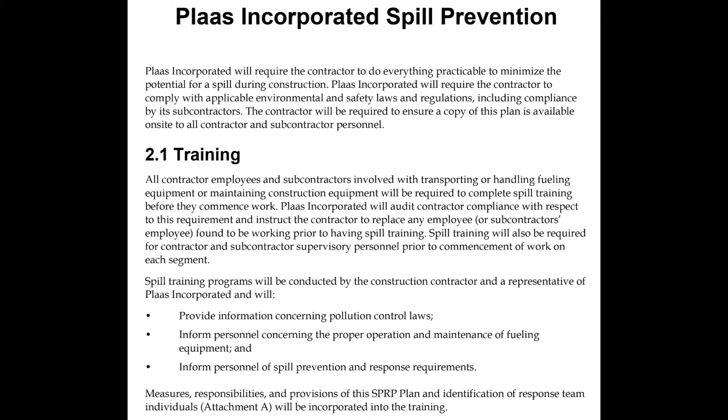Spill training will also be required for contractor and subcontractor supervisory personnel prior to commencement of work on each segment. Spill training programs will be conducted by the construction contractor and a representative of Plaas Incorporated and will provide information concerning pollution control laws, inform personnel concerning the proper operation and maintenance of fueling equipment, and inform personnel of spill prevention and response requirements. Measures, responsibilities, and provisions of this SPRP plan and identification of response team individuals, Attachment A, will be incorporated into the training.

Training for other workers will be provided through ongoing weekly meetings which will discuss safety and spill prevention and response, including personal responsibility to initiate appropriate procedures. These weekly sessions will be held by the contractor as crew tailgate meetings. Plaas Incorporated will audit the contractor compliance with this requirement and instruct the contractor to replace any foreman or subcontractor's foreman found to not be holding such meetings following the receipt of one warning. Attendance of training sessions will be documented using sign-in sheets, and this will become part of the permanent construction records.

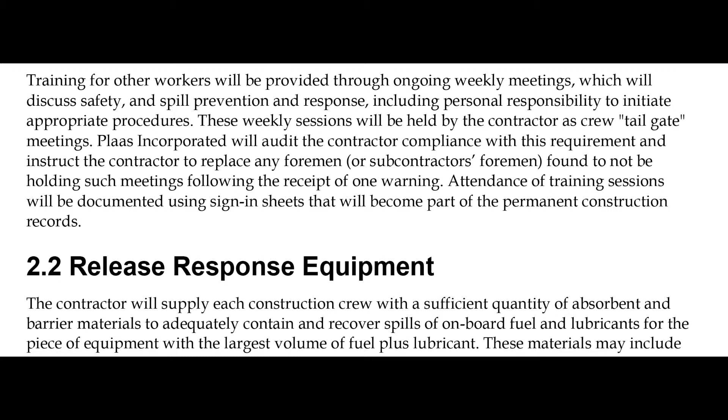Release response equipment. The contractor will supply each construction crew with a sufficient quantity of absorbent barrier materials to adequately contain and recover spills of onboard fuel and lubricants for the piece of equipment with the largest volume of fuel plus lubricant. These materials may include drip pans, buckets, absorbent pads, containment booms, straw bales, absorbent clay, sawdust, floor drying agents, spill containment barriers, plastic sheeting, skimmer pumps, covered holding tanks, fire extinguishers, and other materials as necessary.

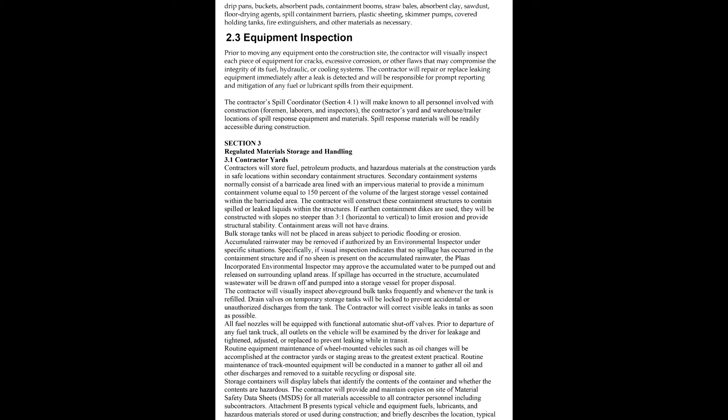Equipment inspection. Prior to moving any equipment onto the construction site, the contractor will visually inspect each piece of equipment for cracks, excessive corrosion, or other flaws that may compromise the integrity of its fuel, hydraulic, or cooling systems. The contractor will repair or replace leaking equipment immediately after a leak is detected and will be responsible for prompt reporting and mitigation of any fuel or lubricant spills from the equipment. The contractor's spill coordinator, Section 4.1, will make known to all personnel involved with construction, foremen, laborers, and inspectors, the contractor's yard and warehouse trailer locations of spill response equipment and materials. Spill response materials will be readily accessible during construction.

Section 3, Regulated Materials Storage and Handling. 3.1, Contractor Yards. Contractors will store fuel, petroleum products, and hazardous materials at the construction yards in safe locations within secondary containment structures. Secondary containment systems normally consist of a barricade area lined with impervious material to provide a minimum containment volume equal to 150% of the volume of the largest storage vessel contained within the barricaded area. The contractor will construct these containment structures to contain spilled or leaked liquids within the structures. If earthen containment dikes are used, they will be constructed with slopes no steeper than 3:1, horizontal to vertical, to limit erosion and provide structural stability.

Containment areas will not have drains. Bulk storage tanks will not be placed in areas subject to periodic flooding or erosion. Accumulated rainwater may be removed if authorized by an environmental inspector under specific situations. Specifically, if visual inspection indicates that no spillage has occurred in the containment structure, and if no sheen is present on the accumulated rainwater, the Plaas Incorporated environmental inspector may approve the accumulated water to be pumped out and released on surrounding upland areas. If spillage has occurred in the structure, accumulated wastewater will be drawn off and pumped into a storage vessel for proper disposal.

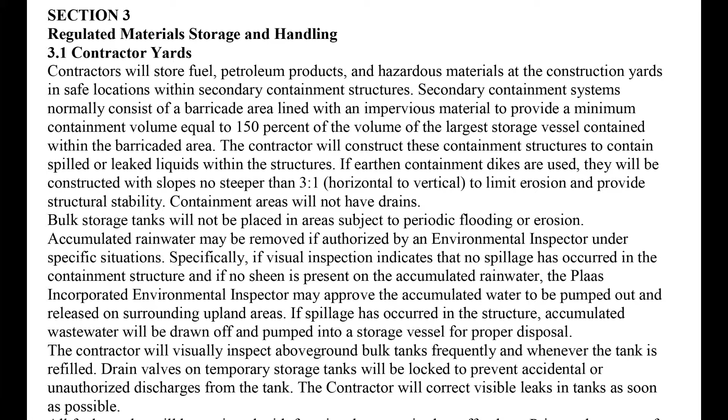The contractor will visually inspect above-ground bulk tanks frequently and whenever the tank is refilled. Drain valves on temporary storage tanks will be locked to prevent accidental or unauthorized discharge from the tank. The contractor will correct visible leaks in the tank as soon as possible. All fuel nozzles will be equipped with functional automatic shutoff valves. Prior to departure of any fuel tank truck, all outlets on the vehicle will be examined by the driver for leakage and tightened and adjusted or replaced to prevent leaking while in transit.

Routine equipment maintenance of wheel-mounted vehicles such as oil changes will be accomplished at the contractor yards or staging areas to the greatest extent practical. Routine maintenance of track-mounted equipment will be conducted in a manner to gather all oil and other discharges and remove to a suitable recycling or disposal site.

Storage containers will display labels that identify the contents of the container and whether the contents are hazardous. The contractor will provide and maintain copies on site of Material Safety Data Sheets, MSDS, for all materials accessible to all contractor personnel, including subcontractors.

Attachment B presents typical vehicle and equipment fuels, lubricants, and hazardous materials stored or used during construction, and briefly describes the location and typical quantities and usual methods of storage. Storage methods and quantities vary with the length of pipeline, construction segments, the time of year, and the type of terrain. The contractor will provide, maintain, and make available the appropriate MSDS documents for all hazardous or controlled materials utilized on the ROW or in the contractor yards at an on-site location, accessible to all contractors, subcontractors, and Plaas Incorporated employees.

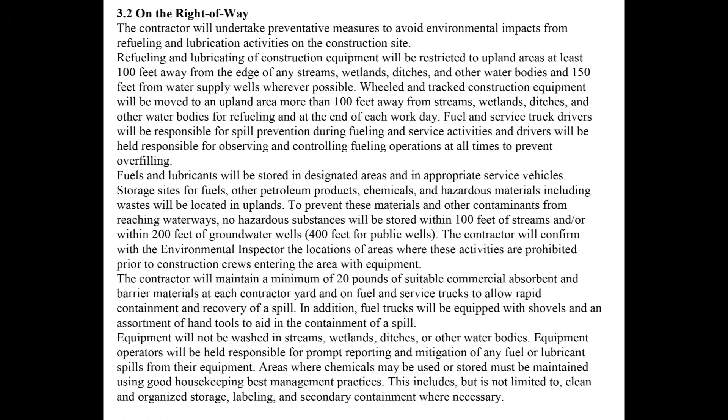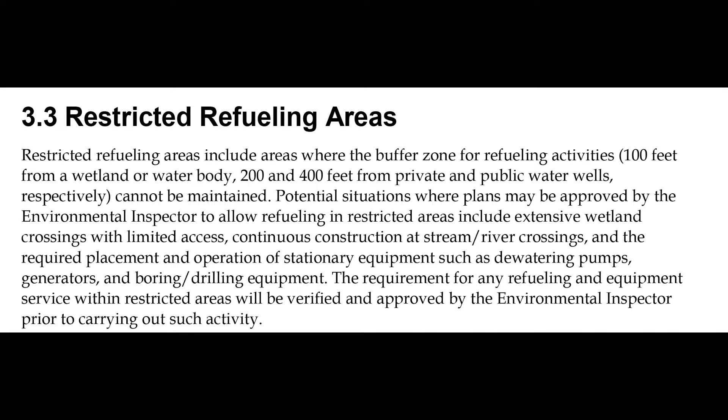3.3. Restricted refueling areas. Restricted refueling areas include areas where a buffer zone for refueling activities, 100 feet from a wetland or water body, 200 and 400 feet from private and public water wells, respectively, cannot be maintained. Potential situations where plans may be approved by the environmental inspector to allow refueling in restricted areas include extensive wetland crossings with limited access, continuous construction at stream and river crossings, and the required placement and operation of stationary equipment such as dewatering pumps, generators, and boring drilling equipment. The requirement for any refueling and equipment service within restricted areas will be verified and approved by the environmental inspector prior to carrying out such activity.

Tracked equipment. Only a fuel truck with a maximum of 300 gallons of fuel may enter restricted areas to refuel construction equipment. Two trained personnel will be present during refueling to reduce the potential for spills or accidents. If the equipment operator is used as one of the two trained persons on the site, that person should be directly involved with the refueling process, i.e. not just sitting in the equipment, so that he or she can respond immediately to any overfilling.

Stationary equipment. Equipment such as large stationary pumps may be fitted with auxiliary tanks as appropriate. Such auxiliary tanks will be placed within a secondary containment structure. Refueling of dewatering pumps, generators, and other small portable equipment will be performed using approved containers with a maximum volume of 10 gallons.

Alternatively, a pickup truck mounted tank up to 300 gallons may be used to fill the secondary fuel tanks, provided the pump hose has an automatic cutoff sensor and provided the person conducting the refueling does not leave the filling location. Non-empty fuel containers will be stored in an upland area at least 100 feet from the wetlands and water bodies.

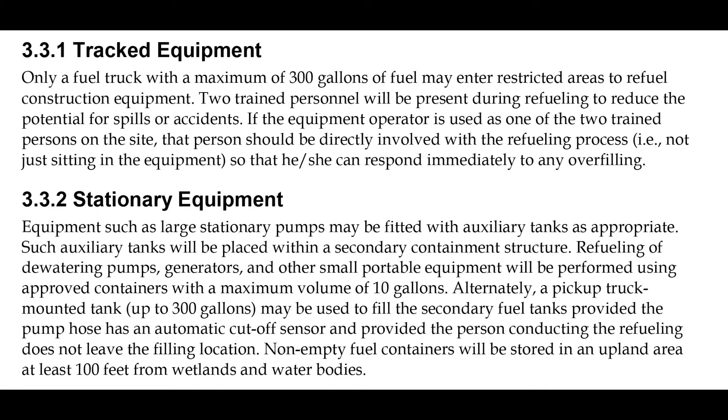Vehicle and equipment maintenance. All vehicle and equipment maintenance involving fluid replacement will be conducted outside the boundary restrictions for wetlands, water bodies, and water wells. Before lubricants are drained from the construction equipment, a suitable containment vessel and plastic sheeting will be placed under the equipment to collect any spilled material. The contractor will take necessary precautions to ensure the material that might accumulate on the liner does not spill on

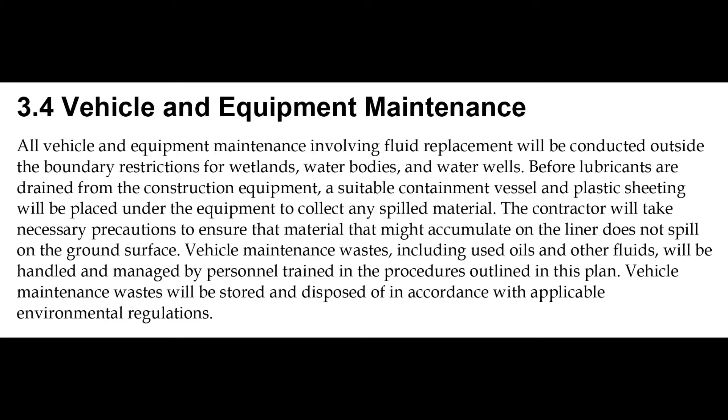the ground surface. Vehicle maintenance waste, including used oils and other fluids, will be handled and managed by personnel trained in the procedures outlined in this plan. Vehicle maintenance wastes will be stored and disposed of in accordance with applicable environmental regulations.

Section 4, Spill Response. In the event of a spill, the release will be contained and cleaned up as soon as possible. The order of priorities after discovering a spill are to protect the safety of personnel and the public, minimize damage to the environment, and control costs associated with cleanup and remediation. The initial response to an emergency will be to protect human health and safety and then the environment.

If a spill is not contained within a dike, an area of isolation shall be established around the spill. The size of the area will depend on the size of the spill and the materials involved. The contractor will take precautions in the area of a spill to eliminate possible sources of ignition.

Spill Coordinator. The contractor will appoint a spill coordinator who will be responsible for the reporting of spills, coordinating contractor personnel for spill cleanup, subsequent site investigations, and associated incident reports. The spill coordinator will report to the environmental inspector and may be removed from that role by Plaas Incorporated. In the event of a spill, the spill coordinator along with the environmental inspector will be responsible for determining the extent of the isolation area.

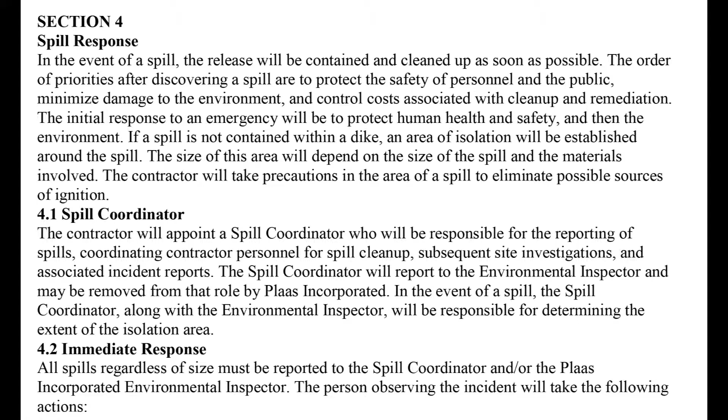Immediate response. All spills, regardless of size, must be reported to the spill coordinator and/or to the Plaas Incorporated environmental inspector. The person observing the incident will take the following actions. Assess the safety of the situation, including the risk to the surrounding public. If safe to do so, make every effort to remove potential ignition sources and stop the source of the spill. Promptly notify the contractor's spill coordinator and/or Plaas Incorporated's environmental inspector. Report your name, the spill location, and the extent of the incident.

Upon learning of the spill, the coordinator will implement the following measures. For an upland spill, if necessary, barricades will be constructed with available equipment to physically contain the spill. Sorbent materials will be applied to the spill area. Contaminated soils and vegetation will be excavated and temporarily placed on and covered by plastic sheeting in a containment area a minimum of 100 feet away from any wetland or water body until proper disposal is arranged.

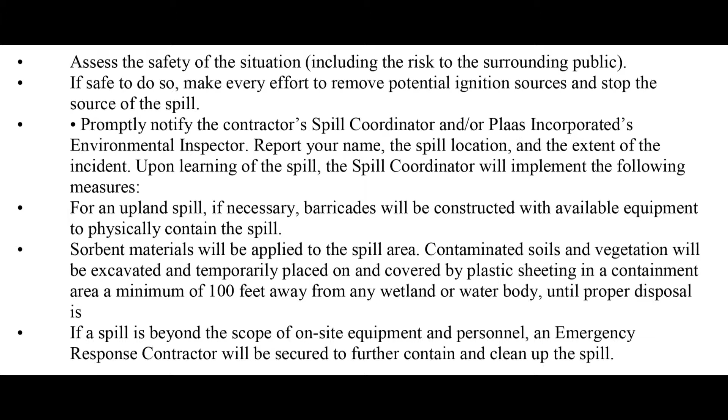If a spill is beyond the scope of on-site equipment and personnel, an emergency response contractor will be secured to further contain and clean up the spill. Wetland or water body response. Regardless of size, the following applies to spills occurring near or into a stream, wetland, or other water body. For spills in standing water, floating booms, skimmer pumps, and holding tanks will be used by the contractor to recover and contain released materials on the surface of the water.

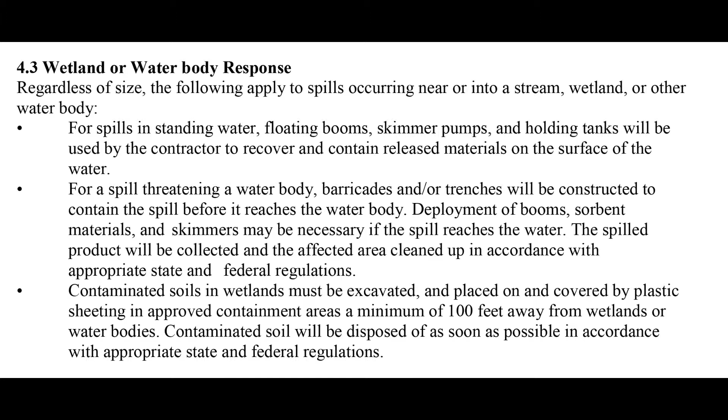For a spill threatening a water body, barricades and/or trenches will be constructed to contain the spill before it reaches the water body. Deployment of booms, sorbent materials, and skimmers may be necessary if the spill reaches the water. The spilled product will be collected and the affected area cleaned up in accordance with appropriate state and federal regulations. Contaminated soils in wetlands must be excavated and placed on and covered by plastic sheeting in approved containment areas a minimum of 100 feet away from wetlands or water bodies. Contaminated soil will be disposed of as soon as possible in accordance with appropriate state and federal regulations.

Section 5, Reporting. With assistance from the environmental inspector, the spill coordinator is responsible for the completion of the spill report form. Completion of this form will assist in the assessment of the spill and provide information necessary for agency notification. The form will be completed and submitted to the Plaas Incorporated representative within 24 hours of the occurrence. The Plaas Incorporated representative will notify the appropriate agencies.

Section 6, Notifications. In the event of an accidental release of a reportable quantity, Plaas Incorporated or its representative will notify the appropriate federal, state, and local agencies. Section 6.1, federal and state agencies: the National Response Center, Washington, D.C., phone 800-424-8802.